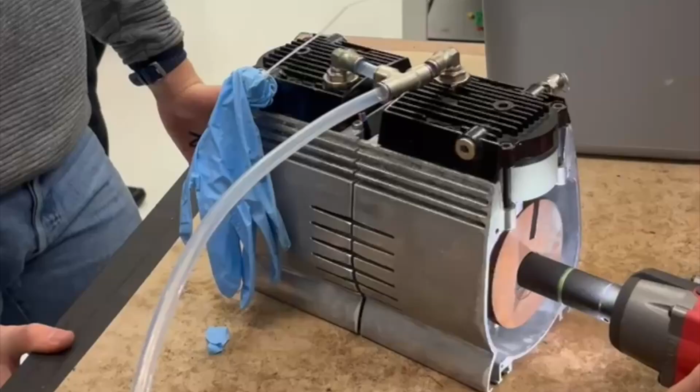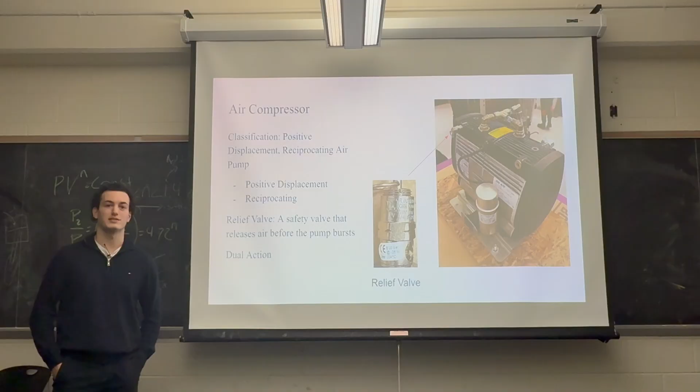The compressor is a dual-action positive displacement reciprocating air pump. As a positive displacement device, it moves air by trapping a fixed volume and mechanically reducing its space, making the delivered flow rate primarily a function of RPM.

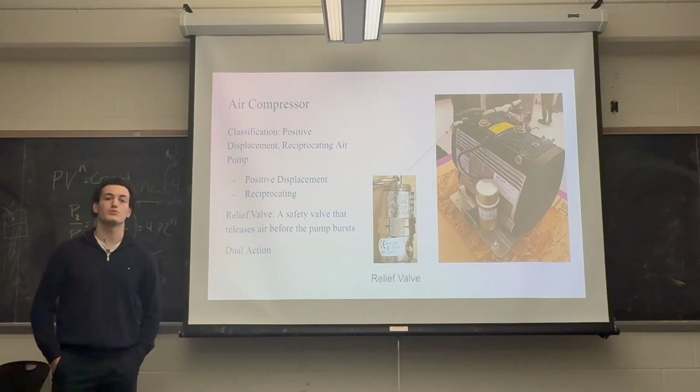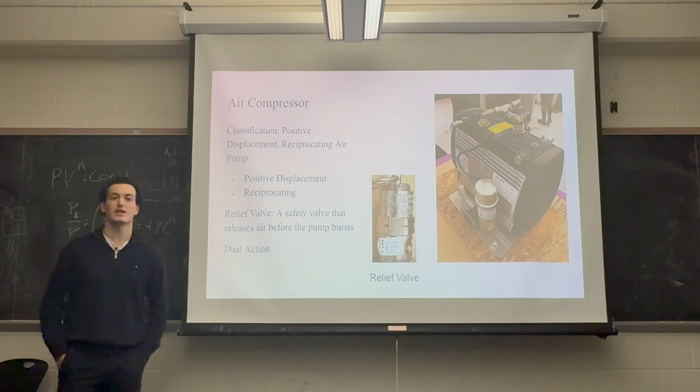Its reciprocating motion varies the chamber volume and uses check valves to direct air through the system. Dual-action operation compresses air on both piston strokes, doubling the effective flow rate and providing smoother, more continuous delivery, with pistons 180 degrees out of phase. The relief valve protects the system by venting air when internal pressure exceeds a safe threshold.

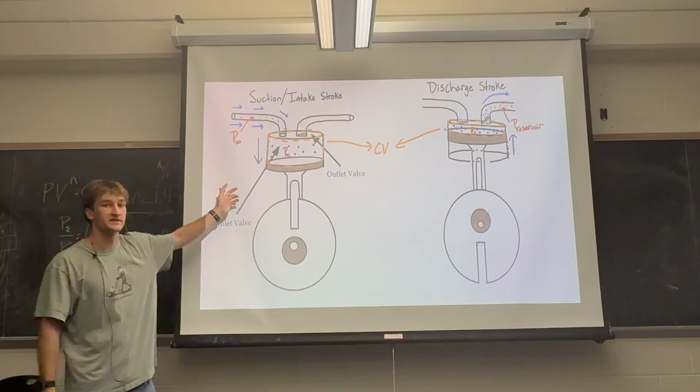For a quick fluid mechanical overview of how it works, let's take a look at one of the piston assemblies. We define a control volume bounded by the head of the piston, the walls of the cylinder, and then the actual manifold head.

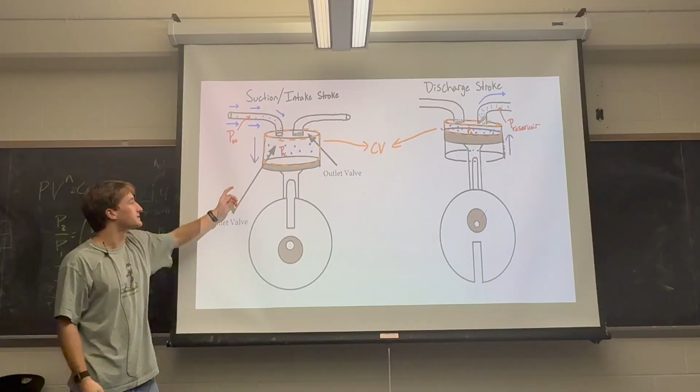As the piston moves down, this control volume increases, which creates a pressure difference between the pressure in the cylinder and the pressure in the intake. This forces air from the intake into the cylinder.

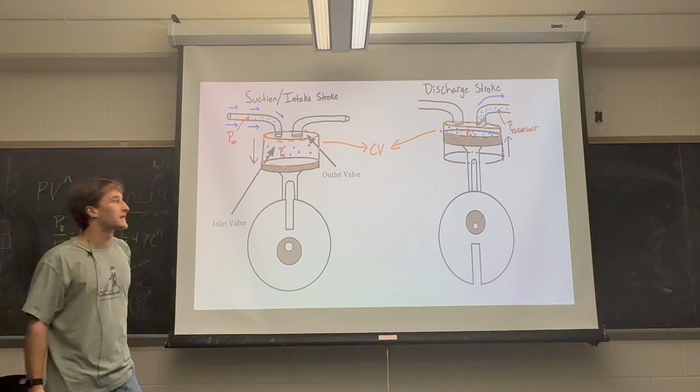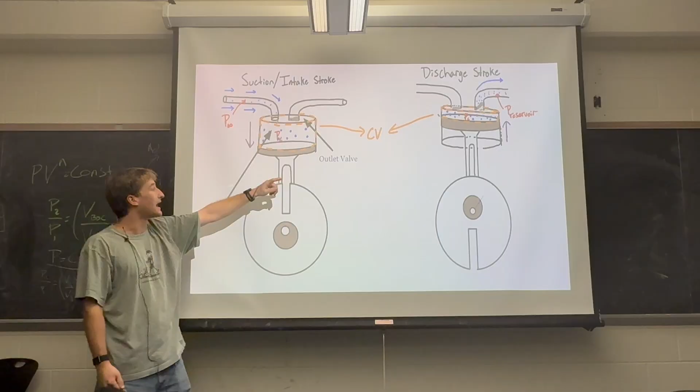For the discharge stroke, the opposite happens. The piston moves back up, decreasing the size of the control volume, which creates a pressure difference again between the pressure in the cylinder and the pressure in the reservoir. This air in the cylinder is then forced up through the outlet valve and into the outlet manifold or reservoir.

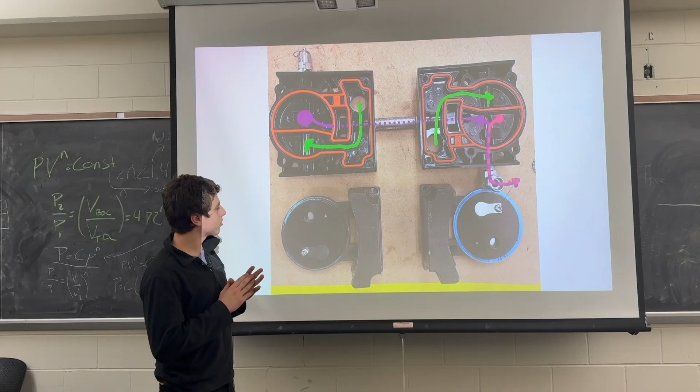On the discharge stroke, it goes through this reed valve, through here, and then out the outtake. This side of the system is for the second piston assembly, and they work exactly the same, but 180 degrees out of phase.

The Reynolds number is high due to low viscosity and small valve diameters. Thus, sudden expansions and bends create strong adverse pressure gradients.

The boundary layer can't stay attached, so flow separates, forming vortices and recirculation pockets right behind the valve slots, causing inefficiencies in the system. Since the Reynolds number is high, the flow is turbulent.

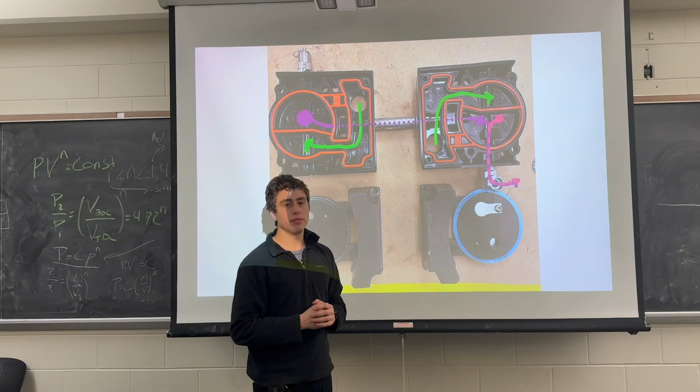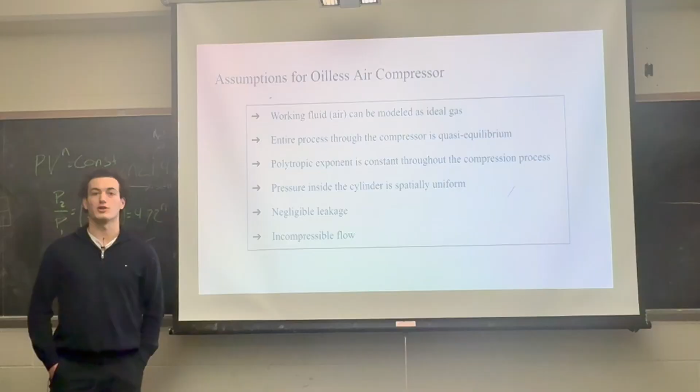For the system, we can reasonably model the working fluid as an ideal gas and treat the compression process as quasi-equilibrium. This is because the piston speeds are low relative to the speed of sound, thus allowing pressure and temperature to equalize rapidly throughout the cylinder.

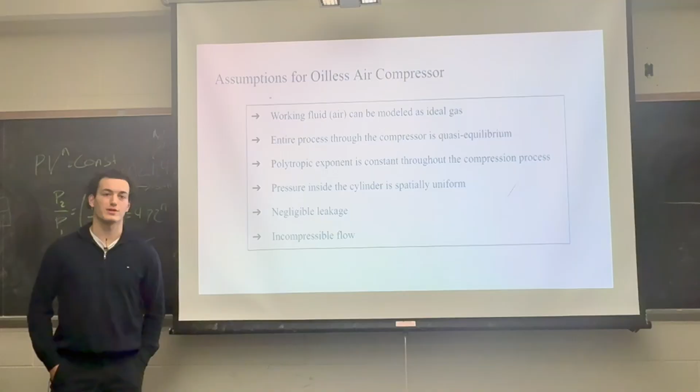This also supports the assumption of spatially uniform pressure, using a constant polytropic exponent to represent the behavior of each compression cycle. Having well-sealed pistons and valves justifies neglecting leakage, and because flow velocity through valves and passages remains well below Mach 0.3, density changes in these regions are minimal, allowing incompressible flow relations.

So we drove the pump with a drill, and we measured the RPM with a visual tachometer on that piece of tape. We also measured the speed of the exit velocity with an anemometer.

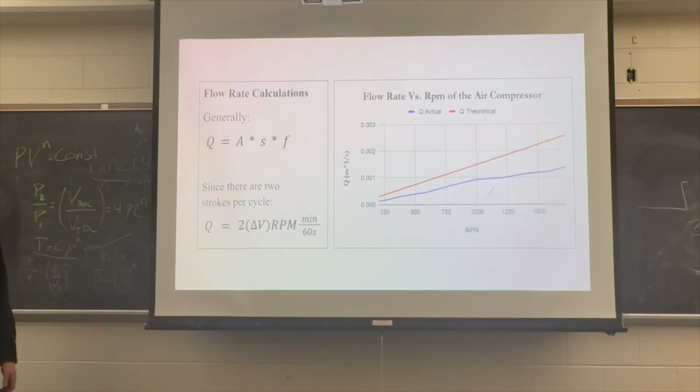Using the data from driving the pump with the drill, we found the flow rate against RPM. We did this using the formula: the change in volume of the cylinder, multiplied by 2 since there are 2 cylinders, times the rotations per second.

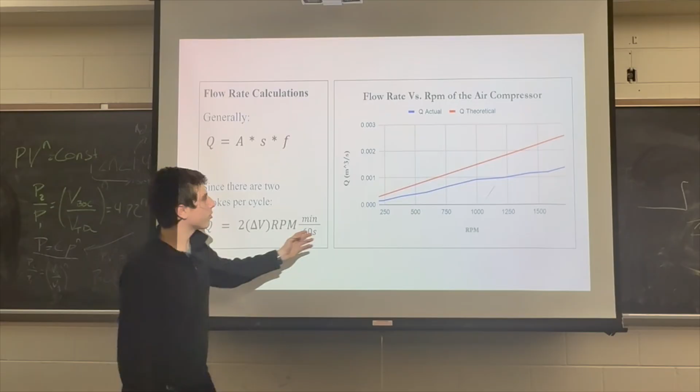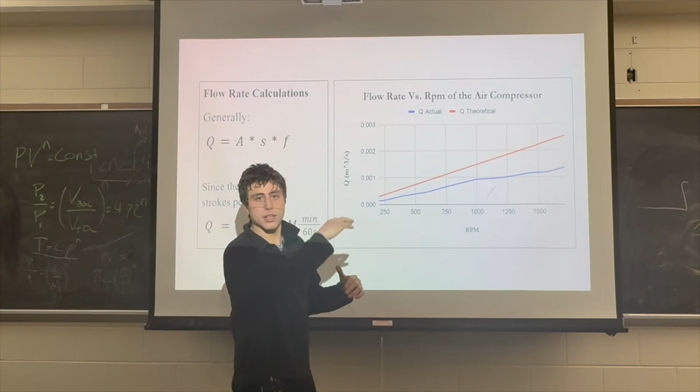In graphing it, we found the theoretical line versus the actual line from our data. The actual line separates from the theoretical line at larger RPM, because when the pistons are moving faster, air has less time to enter the cylinder before it starts its discharge stroke, thus creating larger inefficiencies.

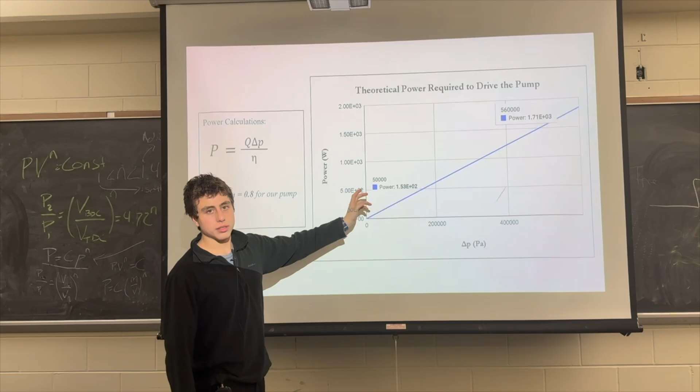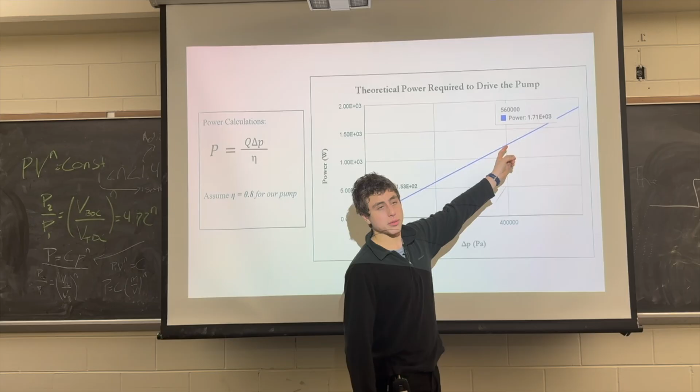Using the values we obtained, we also calculated power, with a typical efficiency of about 0.8. When the ambient pressure is close to the pressure in the reservoir, the power required to drive the system is about 0.15 kilowatts, while when the reservoir is near the maximum that the pump can withstand, at about 6 bar, the power required to drive the system is 1.7 kilowatts.

From the piston diameter and the 2 piston positions, we get a purely geometric volume ratio of 4.66. However, this is not equal to the pressure ratio because the system is not isothermic.

The assumptions just explained allow us to use the polytropic relation to derive the pressure ratio. Since our system has some heat transfer, but not zero or maximum, we assume a polytropic exponent of 1.2. That gives us a pressure ratio of 6.33, a much more realistic value that lines up with the 6 bar relief valve pressure. Thank you for listening.